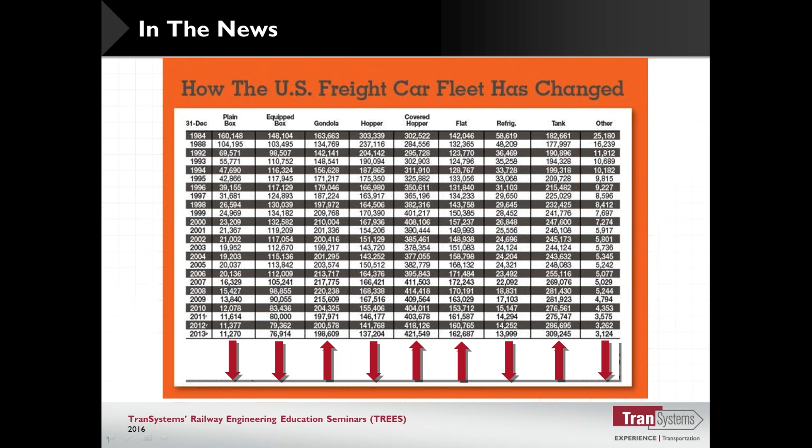What we're going to look at in this section is mainline capacity improvements and how they're different from what we've been talking about in the past, and then also what are some of the critical things we're going to want to consider when we get out on the main line.

Surprisingly, we kind of ebb and flow with the kind of business we have. Some people spend their whole career just working on industrial track stuff. Some of us, like here in Chicago, we've been doing the majority, not all, but probably about 75%, intermodal related.

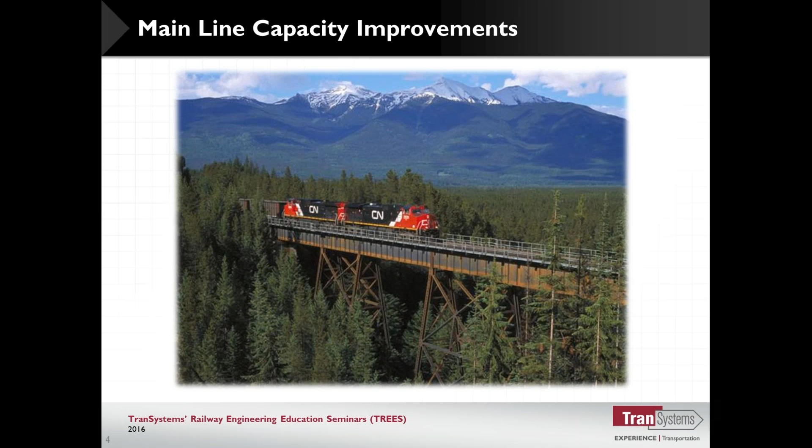And then somebody else will be just doing capacity improvements and never set foot in the yard. What we want to talk about is highlight some of the differences between the main line and the industrial and yard track - how are we going to design that? What are the things we're going to have to pay attention to?

Some things, railroading is still railroading - how do you apply that? It's just a lot different than when you're going 5 or 10 miles an hour versus if you're going to go 60 or 70.

Some of the issues you run across are different. We get more involved with super elevation and those types of things. We worry about grade crossing improvements and capacity issues.

I started my career on a railroad that I think in a lot of ways was really cutting edge, but in others it was a bankrupt railroad. We were going through that period when they were downsizing the railroad industries, and we had a situation where we had a hard time getting our trains over our main line, and our trains weren't running 60 and 70 miles an hour.

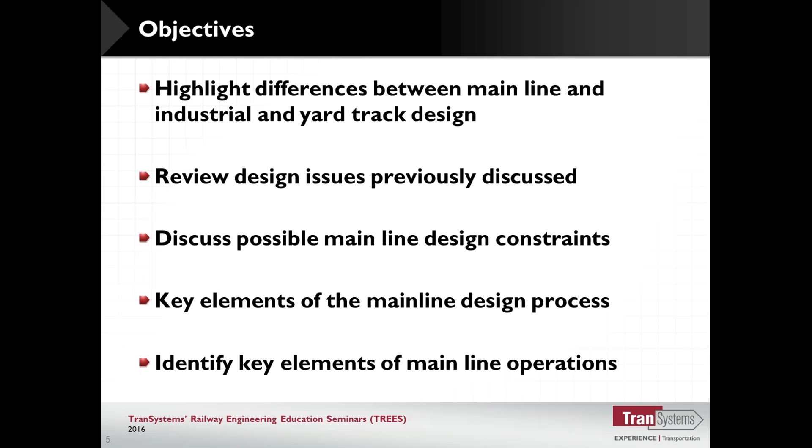We want to identify the key elements of mainline operations, and that whole mindset has to change. The types of projects we're going to get into are capacity projects, siding extensions, new sidings, extending existing ones, double and triple track expansions, and operational improvements.

You might just add a crossover so I can get to this track easier than I could before. The whole premise is to be able to operate the railroad at a faster pace. It's not unlike on a highway when you got a fender bender in the other lanes going the other direction, and the traffic in your lane starts slowing down. You're wondering why that happens.

The important thing is that everything is fluid. That's one of the main criteria on mainline operation: don't encumber the trains, make sure they can go as fast as they can. The faster you go, the more capacity the line has.

We're going to look at new lines, build-ins to industries. A lot of times you'll have a coal mine or some power plant, and they don't build it on your railroad or on one given railroad. In a lot of cases, what happens is I'm served by the BNSF, for instance, and I'll get better rates if I'm also served by the UP, and they build into that power plant. Those are some of the types of projects you might get involved in.

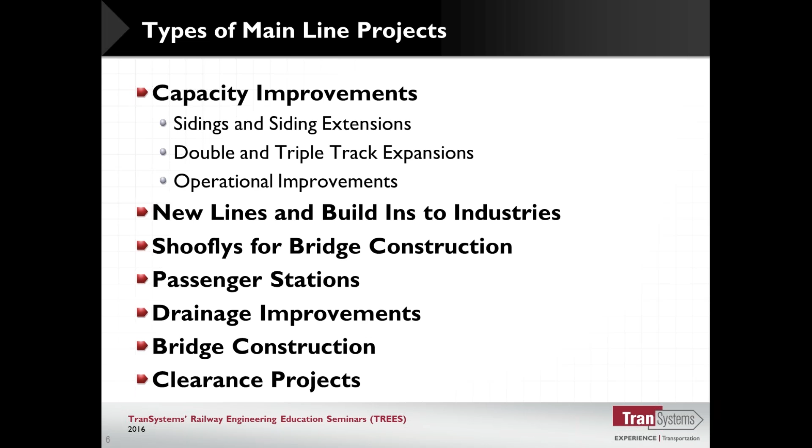Sometimes clearance projects. One of the things CSX and NS are doing on the East Coast is making sure they can get double stack containers into all of their intermodal facilities. On the Western railroads, it's almost taken for granted, not even a concern. But on the East Coast railroads, trying to get into some of these locations is very difficult - sometimes it's old bridges, sometimes historic bridges, sometimes very congested areas where clearances really can't be alleviated to any great extent, or without... I guess anything's possible with enough time and money, you can pretty much do anything, but clearance projects are a major issue on the Eastern railroads.

Common capacity improvement: you start running longer trains. You need longer sidings, or double tracking.

One of the things that the UP and the BNSF, in a race for the Transcontinental Railroad, was to see who could get the furthest the quickest. Right now they're in a similar battle, trying to make sure their main routes are double tracked and eliminate all the single tracks.

There's a lot of places in canyons and in the mountains and other locations where the main line goes down. It's double tracked for the majority of the area, but because of these costly locations to build another track, they get choke points where they have to go from double track down to a single track.

So they have to wait for somebody else to come in the other direction. The double track railroad allows you to run trains. Most of our trains in the United States run right-handed, just like on the highway. You run down the right side, and in the other direction you come back on the other side.

In single track areas, you have to build sidings. You have to make the sidings long enough to handle the longest train that you're going to want to put in the siding, depending on what size that is.

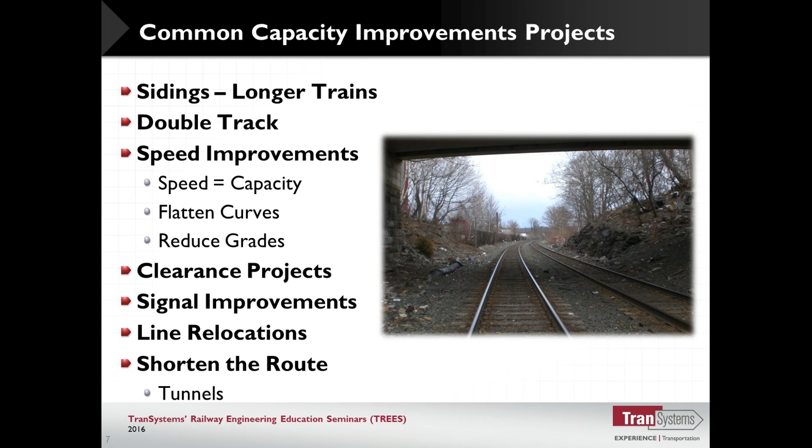Sometimes you shorten the route, add a tunnel. A little bit more uncommon, but something that you have to look at.

So one of the first things we want to look at is what are some of the things we're going to have to do as we get on the main line. And this isn't a whole lot different than if we're working in a yard or any other projects.

If we're working on highway projects, you have to go out there, collect the data, get the existing conditions. Some of the things we're going to look at are survey, the importance of geotechnical investigation, looking at val maps, and what are some of the sources of information that you can get from the railroad, and how valuable it is.

Valuation maps are generally the maps that sometimes are referred to as val maps, other times right-of-way maps. Basically they include all the railroad and the property lines of the railroad, so you can get a pretty good idea of what the railroad owns and the alignment characteristics.

We'll look at track charts as an example. We'll talk about them when we get there.

Conceptual plans, the importance of site visits, and interviews with local personnel. BNSF, for one, has that in all their processes, trying to get historical information by interviewing a roadmaster. What are some of the problems? Do they have slide issues? Do they have track surface issues in that area? So something that, if you're going to make some improvements, you can address them.

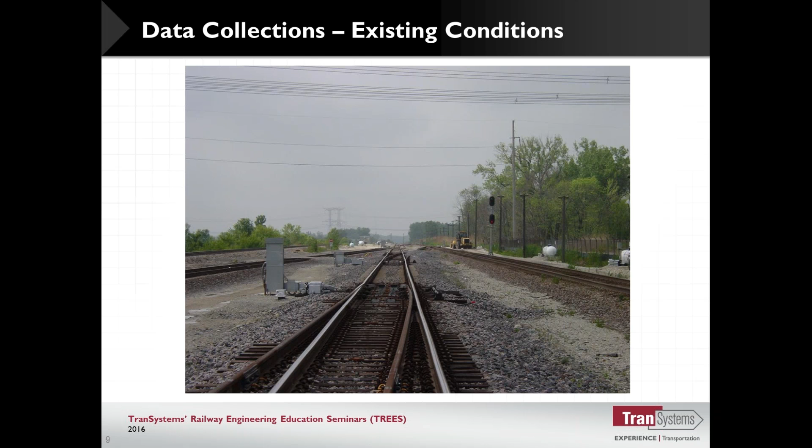As silly as it sounds, you can walk underneath a railroad bridge and forget to have the surveyors check that. But it's even easier to miss a power line crossing that you can barely see, because you're looking at the poles off the right of way, so you just kind of get the conclusion that there's no obstacles out there and you forgot to look up.

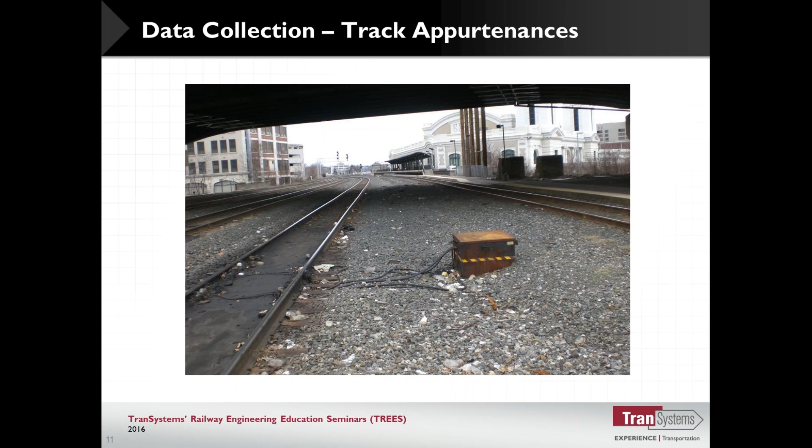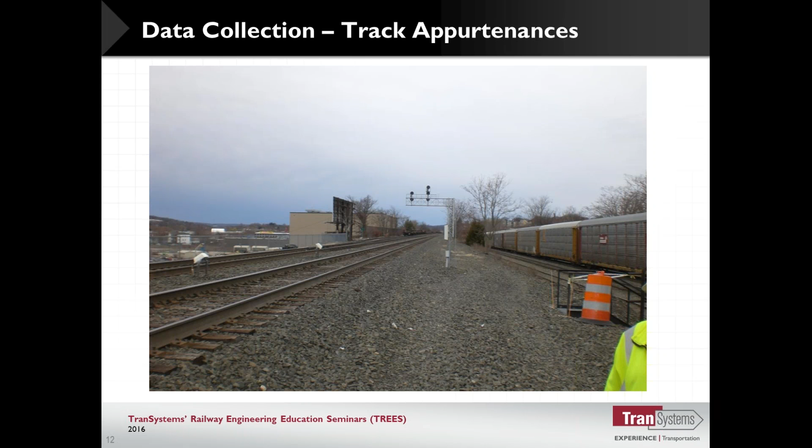Through this one out here, you want to look at stuff—we got the signals. Everybody might look at the signal stuff, but these are AEI readers; they read the numbers on the cars. That's something actually handled by the communications department on the railroad. A lot of times people will bring in the signal guys but forget the telecom guys. The signal guys say, well, that's not my thing. But if we see them out there, even if we don't know what they are, we need to identify those and get the right folks involved. If we're going to make any track changes or add a track, we're going to have to address those.

What you have here is just some terminology. You've got a cantilever signal, signal bungalows, a wayside signal. Here's near a passenger platform—this can be considered a high platform. Generally, it'll go off into the car floor of the commuter railroad.

It's always nice to just take a good glance, take some pictures, do an inspection. Even if you're not a railroad guy, you can see that track isn't very well surfaced. And if you're going to do some work in this area, that may be something you want to address.

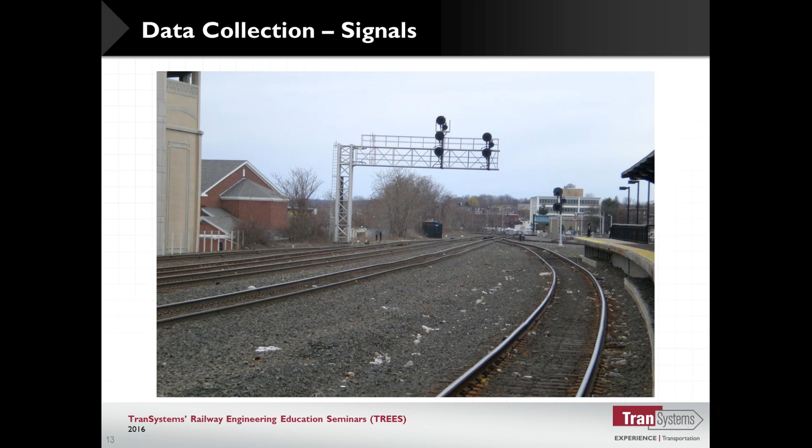This is a signal bridge. Generally, it goes from one side to the other—consequently, that's called a bridge.

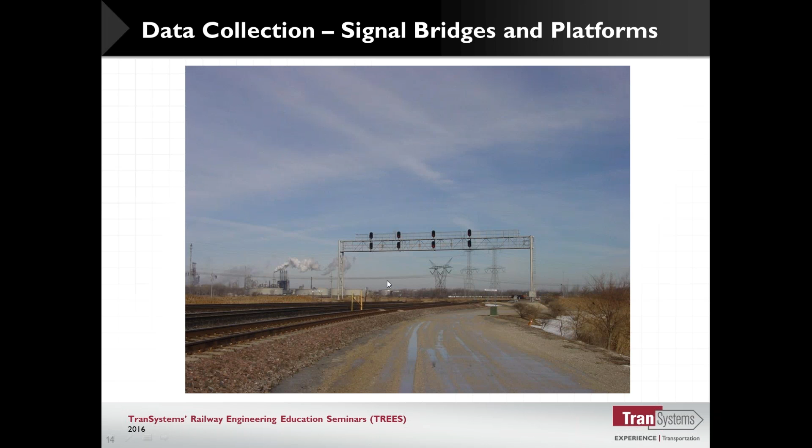One of the other things that's real important is our site visits, to identify issues. We're doing the main line, but if we're going to put another track in out here as part of this project, we may have to remove some of this track. A lot of times what the railroad has done is only remove stuff to the bare minimum to get by—that was particularly true on a railroad like I belong to that was bankrupt, so they didn't do any more work than they had to. As part of our plan set, we want to understand what that is.

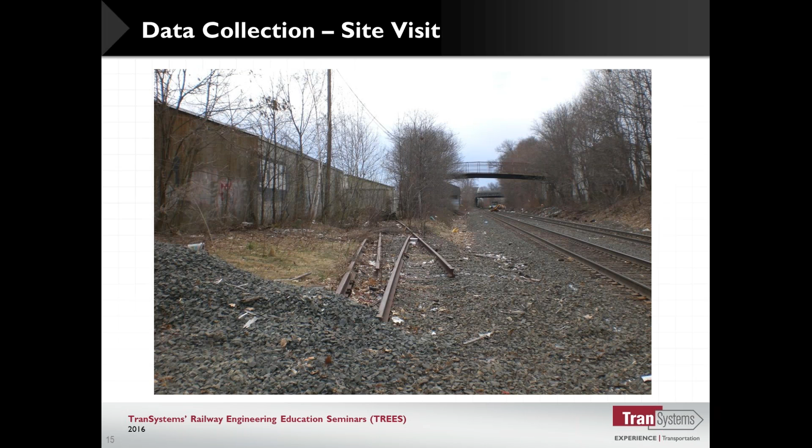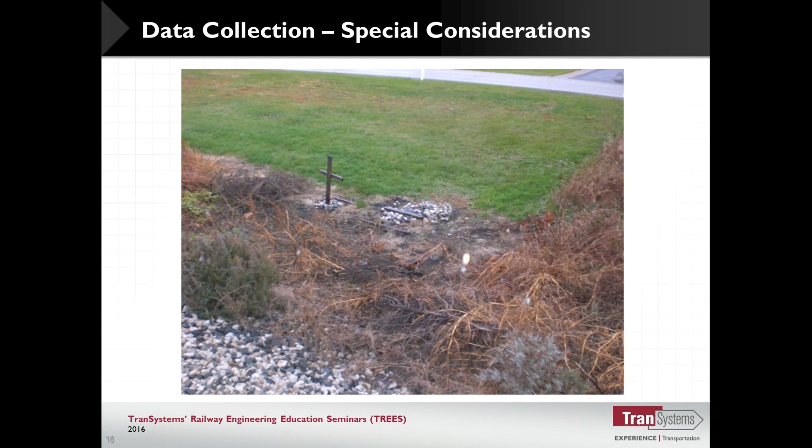Other special things you might run into—we had this situation where we took a picture of this, which we didn't know was some kind of a grave. We assumed at the time it was probably somebody's pet, or it might be a memorial, maybe for a kid who was walking on the track and got hit there. But it turned out they had just buried pets there—they didn't want to do it on their property, so they went over on the railroad. The important thing was that this was a grave or something the survey folks needed to pick up. That's why you do a site visit, take some pictures, and convey that to the surveyors to make sure all that stuff is picked up.

On that photo log, it's really important. One of the things we've been doing, and found very helpful, is doing it in a PowerPoint slide. You can usually have good quality photos, it's easy to label, and you can do a lot of things in here.

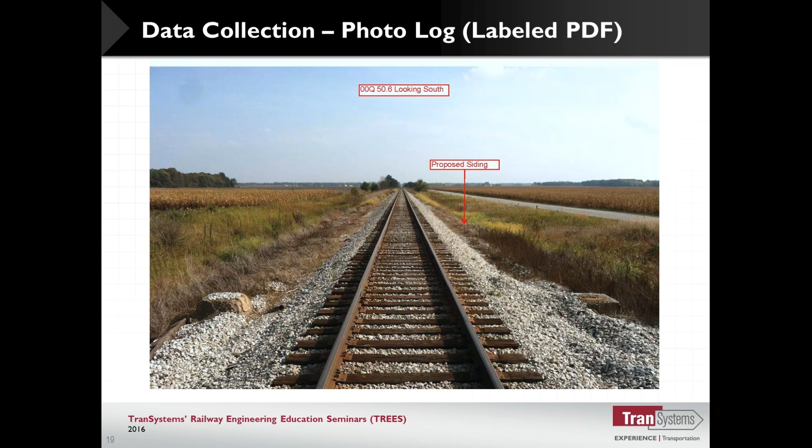One of the other things when you get that survey is to go out there and check it. We did one where the culverts, we got the inverts, the water runs downhill, but what we found was the actual culvert was back-pitched. The water actually ran the other way, so we came to a different conclusion than when we went out there and looked at it based on the survey.

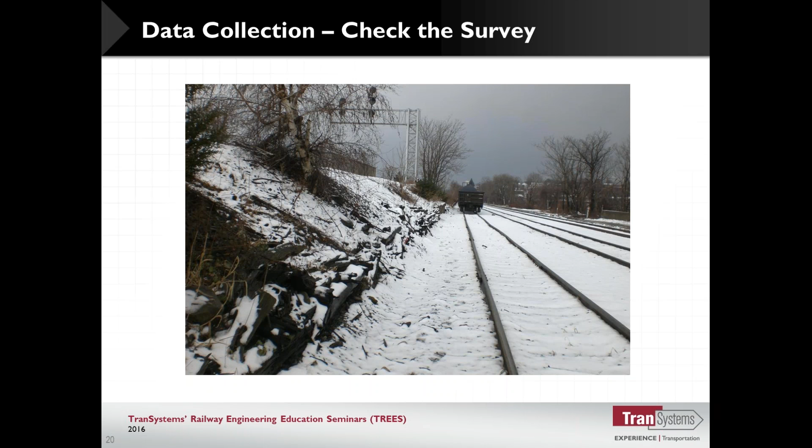Again, identifying the signal bungalows, locating the crossovers, where the signals are, where the right-of-way fences are. This happened to be where that retaining wall in the previous picture was just down below this. So you want to go out there and make sure you understand what the situation is, where there are fences, where there aren't fences, and what impact you have.

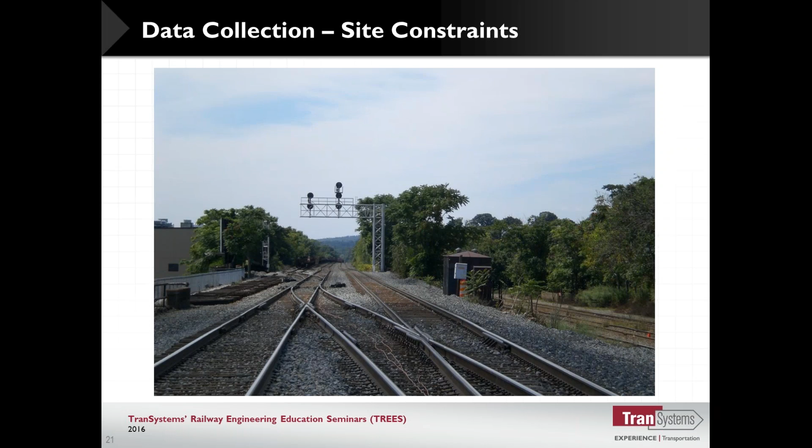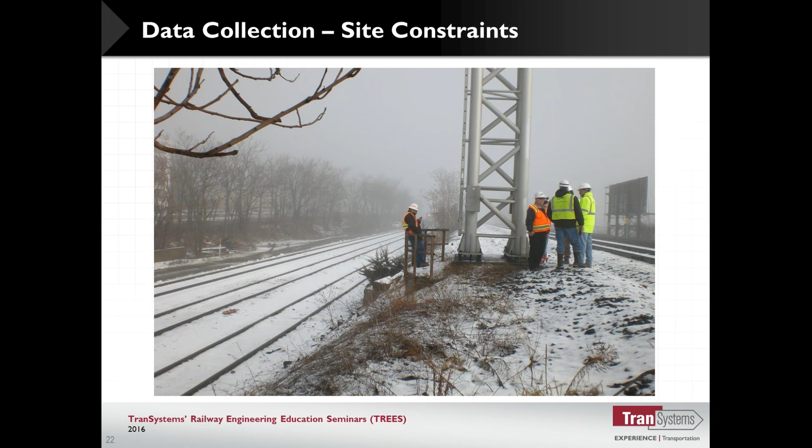There are some obstacles, and a lot of times we can all read the contours, we can look at spot elevations, but get a couple of pictures and it just jumps right out. You have to realize moving that thing out another 10 feet probably isn't going to be as easy as somebody that's not paying attention might think.

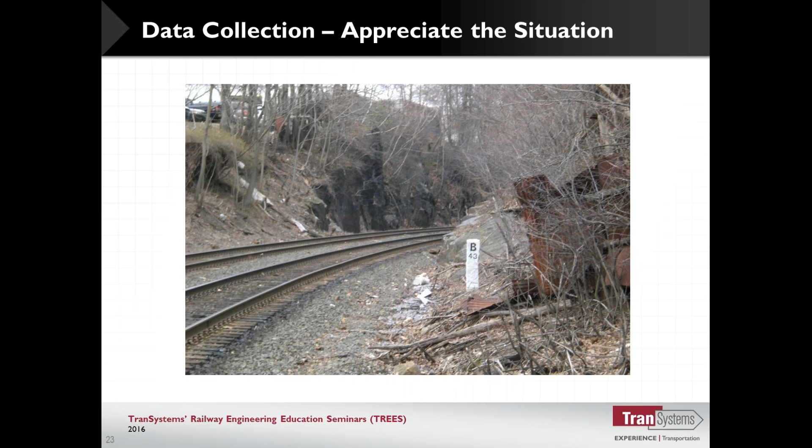You're going to want to take a look at what kind of drainage there is. Not much of a track ditch here, so what kind of drainage situation do you have? Is there potential for drainage problems? You walk out on the railroad on a nice dry day, after it's been dry for several weeks, and the railroad looks a lot better. But try to envision what the situation looks like on that rainy day. Sometimes you want to get out there right after a rain, or during a rain, to find out what the situation is, so you can appreciate it.

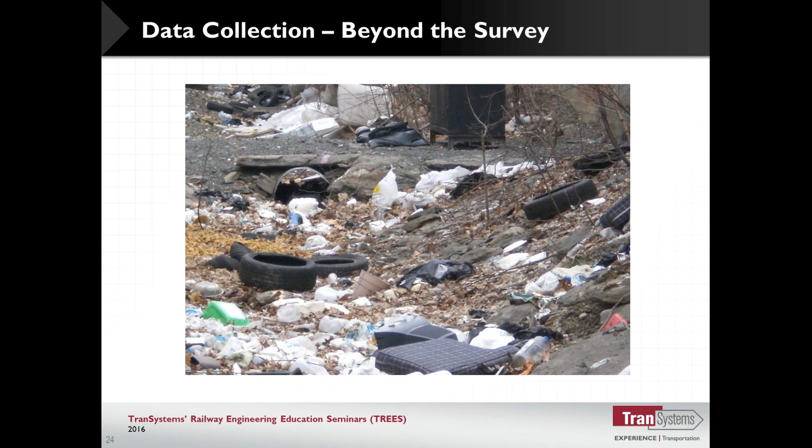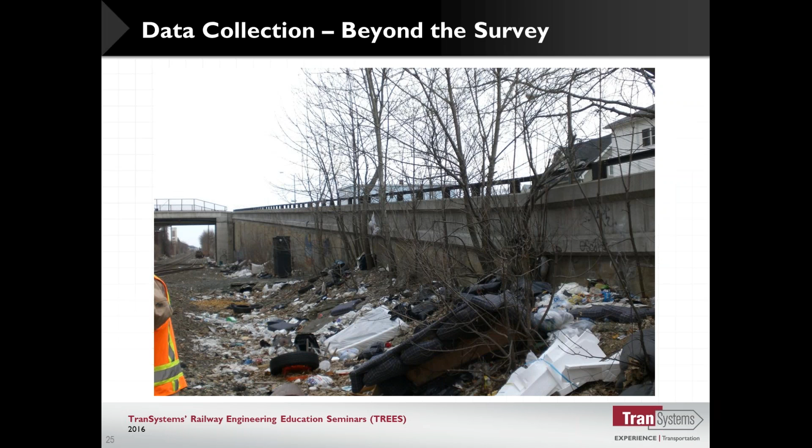One other thing has nothing to do with the railroad directly, but this happens to be right where we're putting a siding. Not only was it a debris area, but asking some of those questions to the local guys, they use this as a dump. There's a road out here that's kind of separated. The main road is actually on the other side of these houses, but it made it real easy for people to just drive up and throw things over the fence. What we're trying to do is extend this siding down through here, so if people are going to dump there and we're going to have a track there, what kind of ramifications are there? So what we proposed, and what the railroad wanted to do, was put a fence in here just to make it harder for people to dump garbage.

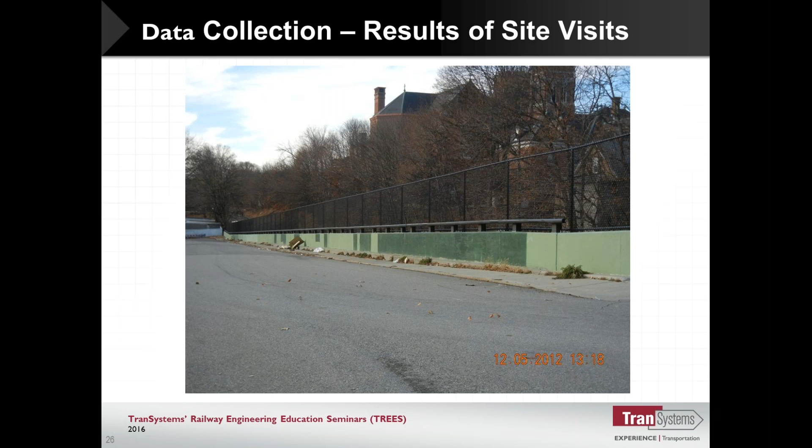Those are the things that are part of the job you have, but being able to do that site visit, being able to ascertain what the issues are, is something you can resolve.

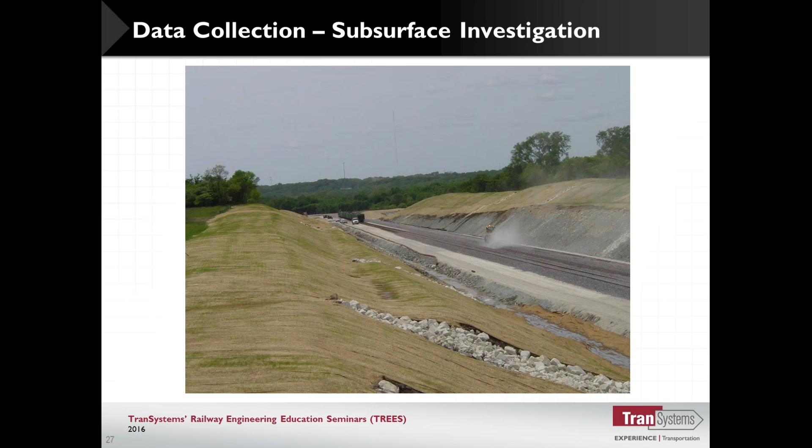You can talk to the local roadmaster, and they can have a pretty good idea how deep the rock is. There are a lot of ways to tell that, but the geotech investigation is one of the main reasons you're going to do that. You're going to want to put together the profile of what you're trying to do, so you can identify what the issues are.

There's a cross section, and the first thing we did was take borings around where the track was, and found out the rock was going to be fairly shallow. So one of the things that caused the problem is, which way does the rock go? If we knew the rock was halfway here, at 20 feet deep, did the rock go this way, so it might actually go out of the ground, or was it level or not?

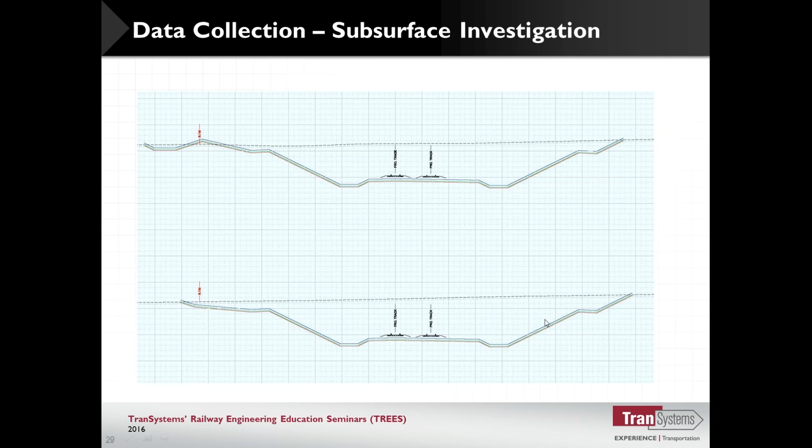So what we had to do was take some shots outside of where our cut was to try the best we could to identify what that plane was. When you start removing this much rock underneath the railroad, it gets fairly expensive. The more expensive the potential, same way if you're trying to go through a peat bog - railroad doesn't work so good in a peat bog - so you have to find out how deep the soil is that you're going to have to remediate.

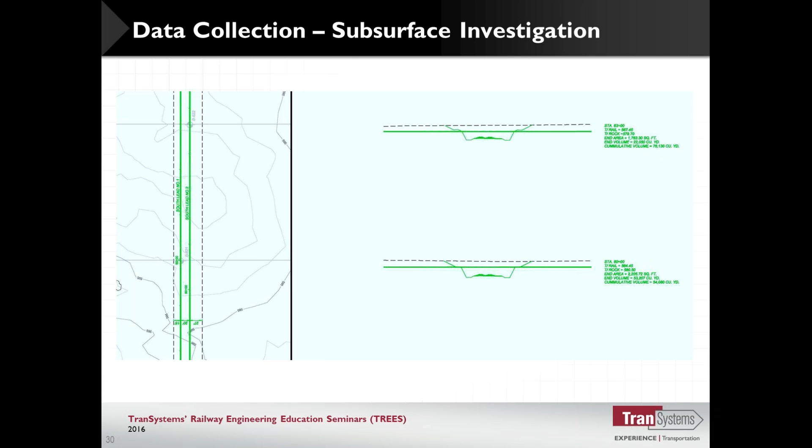Another thing you want to look at is data collection regarding a track chart. It's a little hard to read here, but each railroad does it a little different, and you end up with a lot of information - you get the grade, and sometimes some of the railroads give you approximate elevation. I wouldn't ever use this to design my track, but it gives you a good idea of which way the track is.

We had a situation on the UP where a developer had to develop a site, and we were just using Google Earth, and they thought they were out there on the site - oh, it's real flat. Well, when we were moving our cursor over on Google Earth, we found out there's about 300 feet difference from one end of the yard to the other, right next to the railroad. The client was saying, well, we were out there and it's flat - it can't be right, or it can't be wrong.

Then we got the railroad's track chart, and it showed that it was a 2% grade. Like I said before, you very rarely find a 2% grade on a Class 1 railroad's main line, and there it was - that kind of confirmed it. So, Mr. Developer, you've got more of a problem here. When you thought it was flat, your 8,000-foot tracks - we ended up, when we did the grading models just for the conceptual stage, talking about 30 million yards of dirt, and it was difficult to overcome those grades even at that.

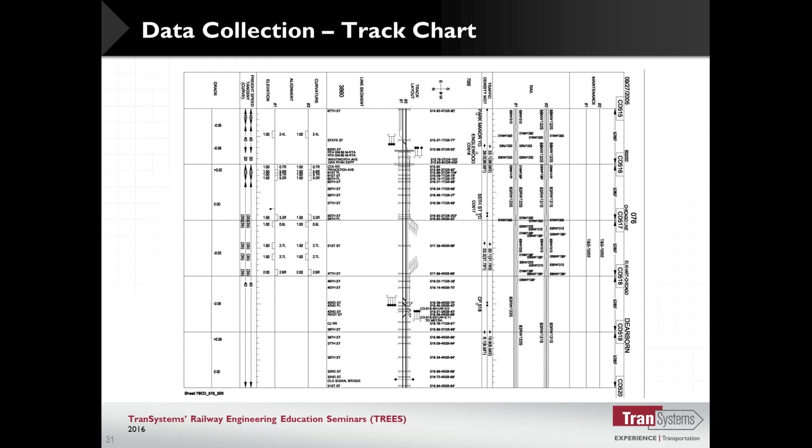You can also identify where the crossovers are - so I have a crossover here. If you're going to have to do something for staging, how far does the train have to go before it can cross over to the other track and run around my work area? There's a lot of stuff you can learn from the track chart, so you want to get them as quick as you can from the railroad.

Most of these will give you the data on who owned the property and when, so you can sometimes find the deeds. If you're going to try to swap property, you can get the railroad involved, but a lot of times the deeds, a lot of railroad stuff, it reverts to the adjacent property owner when you sell. So you always want to try to identify these things.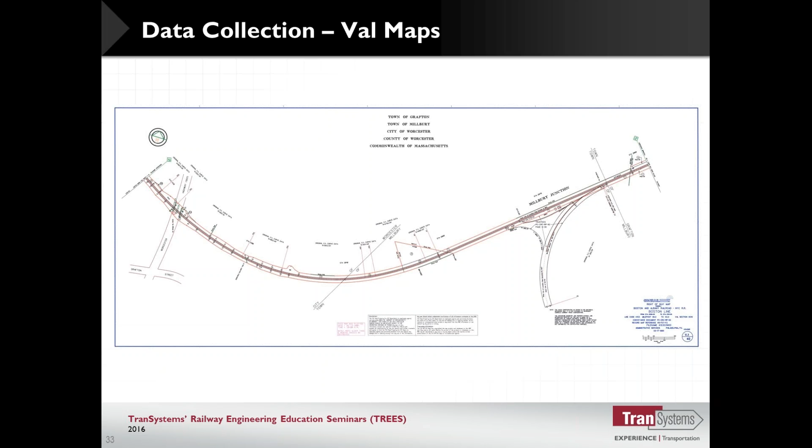These will also, most times, identify pipeline crossings or aerial power lines that go across. You can find out the agreement number, and then the railroad can trace that down and find out what kind of rights you have or what rights they have.

So one of the things, based on all that, after we get our survey, is we're going to try to set up our design considerations. What is that design criteria that we're going to design to?

Differences between passenger and freight: they're both going to be worrying about safety. Passenger is going to be more time sensitive; delays might not be as tolerable. They still want on-time delivery, so the freight trains want to be under control. Everybody's going to worry about speed, but the passengers are going to worry about rider comfort too. You want to go fast, but also make it comfortable for the passengers, and you want to keep the line moving.

You're going to get noise and vibration concerns for the passengers. You ride the CTA, for instance, here in Chicago, and it's really noisy. That's something they haven't really concerned themselves with, but when you start riding transit in other cities, you notice it's quieter and a lot more comfortable. The CTA, much of which is over 100 years old, wasn't quite designed to those standards, and they haven't made any changes.

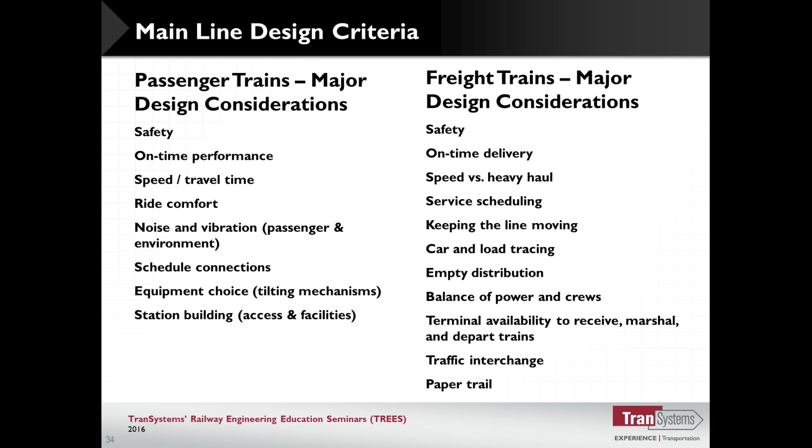But you're going to try to identify what kind of equipment's going to be used, what is the purpose of the line. A lot of times, even if we're dealing with just a freight railroad, Amtrak may be running on it, and we might have to consider that as part of our design criteria. You want to try to identify and document what's going to happen and what you're being asked to do. It's an extremely important step in the process.

On the design criteria, one of the important things is what's the design speed. We also want to understand what is the design speed versus the likely speed, since there are a lot of things that affect the speed we want to run on this subdivision from point A to point B. If the railroad wants to run 60 miles an hour through there, everything in that subdivision will be designed for 60 miles an hour.

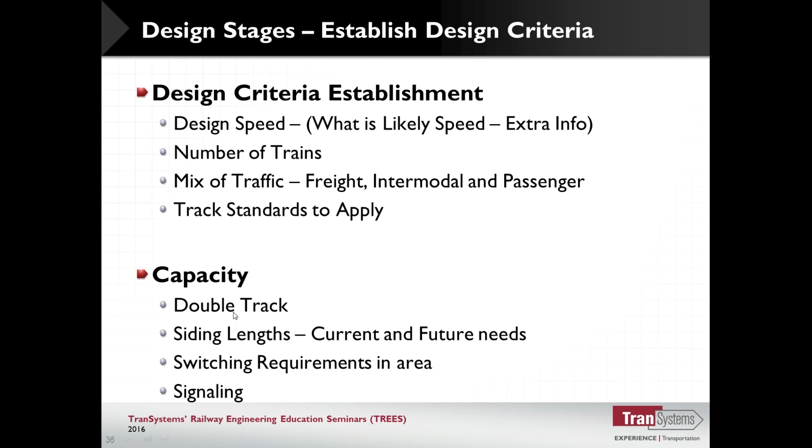What are we trying to accomplish? One of the chief engineers says, 'I can get a lot of people who can do the engineering for me, but the important thing is I need somebody to understand what we're trying to accomplish.' There's a lot of different ways to skin that cat and come up with the right plan, but we want to be able to identify what is the most optimal option in those areas.

Again, what are the train speeds? What's the need going to be for the crossovers, and where do we want that? Is not having a grade crossing imperative or just desired? If it is required, is it relatively inexpensive to relocate that grade crossing or make it a grade separation? Is that what's required? You want to look at property acquisition.

We've dealt with environmental issues and permitting problems. Sometimes we can't do something in the time frame needed, so we put it somewhere else because we can get what we want there. We'd rather have it here, but we need it this year. If we build it there, we're going to have to go through a protracted property acquisition and a prolonged permit process. So we might as well build it here because we have a need right now for that siding, and we try to identify that.

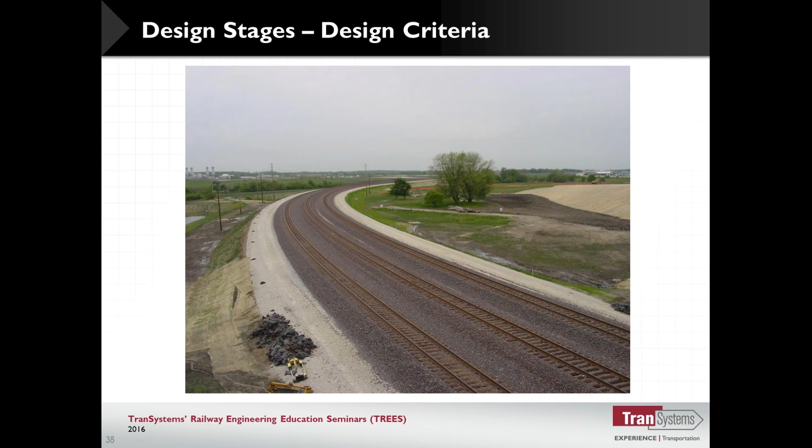So things to consider, just in summary: the track speed, what is the desired speed, are the inspection roads required, side slopes — 2 to 1, 3 to 1, or does the geotech say they have to be something different? If we can't, because we're trying to save property or save on acquisition, maybe we have to make them steeper than 2 to 1. And if they're steeper than 2 to 1, do we have to do some kind of slope stabilization, riprap, or a retaining wall?

Drainage and detention — if we're going to extend culverts, don't always assume that you can just extend culverts. It seems like the logical thing, and most of the railroad guys say okay, that's good. But one of the things the UP is doing in almost all of theirs is, chances are, because of development over the last 50 years, that culvert was sized when it was still farmland. Now it's built up city, and there's a lot more water, a lot more runoff that will go through it. So it's greatly undersized — that's just what's happened over the years. So instead of extending it, which would make the capacity even less, the railroad has been trying to improve all of those, and in a lot of cases, jacking more pipes through. So instead of having a 36-inch pipe, now they've got two 60s, because that's what's required to extend it in the future. They want to do it right from that.

So you want to understand that. Check the floodplain — are you in a floodplain? Are you going to need compensatory storage? What are the things that you want to have?